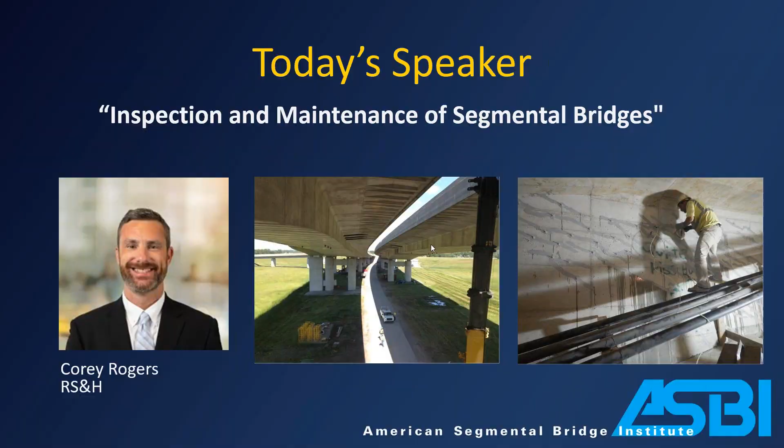It's working on it, Greg. Yep, we got it. We can see your screen and hear you as well.

All right, cool. Thanks, Greg, and thank you to the ASBI Executive Committee for giving me the opportunity to talk a little bit about NBIS inspection and maintenance of segmental bridges. Hopefully y'all learn a little bit about some best practices for both of these topics. We all got a love for segmental bridges, that's why we're here, so hopefully you pick something up here.

To start things off, one of the good reference documents is obviously the FHWA Bridge Inspectors Reference Manual. Even if you've been doing bridge inspections for a long time, it's worth a reread. I feel like every time I dive into the BIRM, as they like to call it, I learn something new or pick up on something different that can be implemented in the field or our inspection processes.

One of the key statements here when we're evaluating a structure is we're rating it on a 9 to 0 scale, 9 being the best, 0 being the worst, on the general condition of the entire component being rated. So we're making that engineering judgment, that inspector judgment in the field, and saying, okay, is this an isolated defect that's not impacting the primary element, or is this systemic across that entire primary component, and do we need to rate it as such?

The caveat being, if the isolated defect does impact the structural capacity of that component, then we can use that isolated defect to lower the condition rating. An example of that would be a segmental bridge - these things can be 1 mile or 2 miles long, so they're quite large. So taking all that into consideration for the superstructure can be challenging, sometimes a lot different than doing like an 80-foot PCI beam.

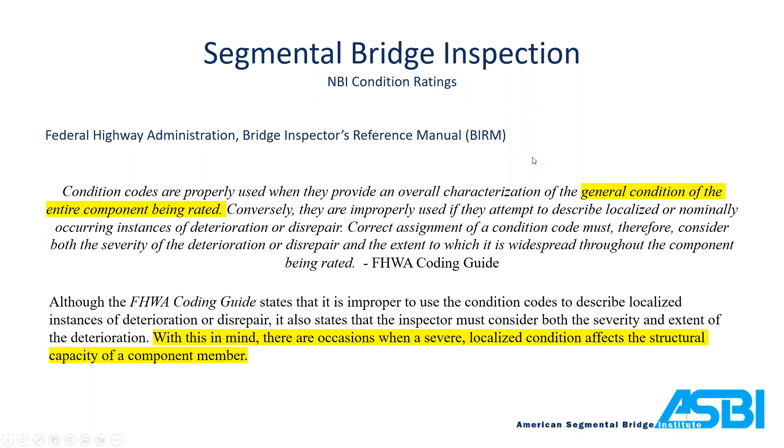So the 2 primary elements I'm going to talk about today are the deck and the superstructure. You can see here on a segmental bridge, it's basically a concrete box with steel reinforcement tendons, and the top flange also functions as the deck. So there's some overlap there between item number 58 and item number 59 in your superstructure, and the ratings should match up and be consistent as far as the comments go.

Again, here's the code description and the rating scale - 9 being excellent condition, which we very seldom use in the field. I'm not sure if I've ever seen a 9. Typically, we can find something wrong, and you can see here an 8 is also very good condition with no problems noted.

And then 7 is a good condition. So anything 9, 8, 7 is considered what we call good. 6 and 5 falls within the fair category, and then 4, 3, 2, 1 is what we would consider poor.

Understanding of what's good, what's fair, and what's poor helps you out in the field. And then the whole process is based on a plus or minus 1 scale, where another inspector may come out and disagree, and be 1 rating off, but as long as we're within 1, then we're good to go, and that's how the system is created.

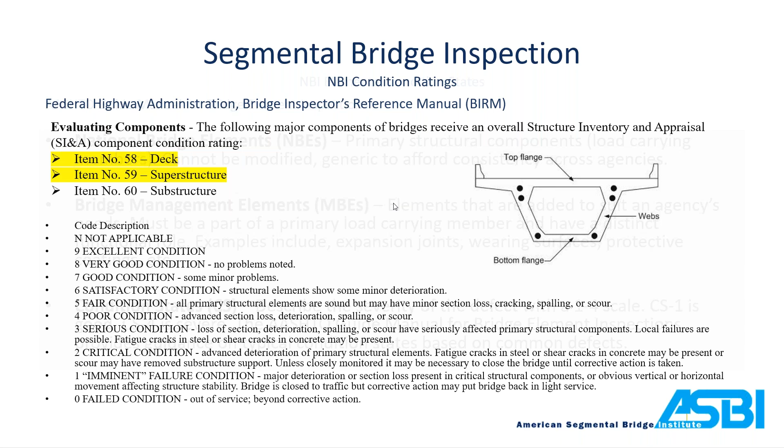In addition to the overall condition ratings, FHWA and AASHTO have implemented the National Bridge Elements, or NBEs, and these get a little bit further into the weeds, where we're actually identifying specific defects and quantifying them for the bridge owner's benefit, so they can schedule maintenance and address issues before they become so large that they impact the overall condition rating of the component.

Take it a step further from the NBEs are what we call the MBEs, the bridge management elements, and these are associated with the primary element, but they're on top. They're a protection system for the primary element. So think like bridge painting. The paint protects your steel, which is the steel beams, the primary element, or concrete surface coating, expansion joints protect everything underneath it. So it's another layer of documentation that bridge owners can use to better manage that structure.

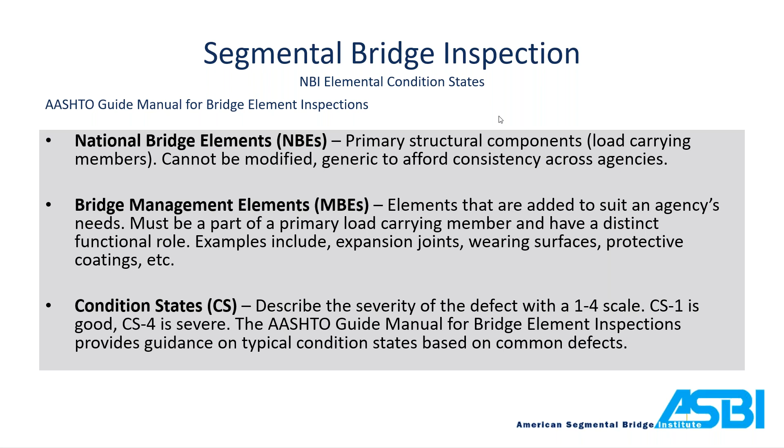And I'll give you some of the common MBE numbers that you're going to see, and these are pretty consistent. So for a segmental bridge, you're going to have NBE number 15 for your deck and slab, 104 for your superstructure.

Then a couple of the bridge management element numbers you would typically see are 520, deck slab protection system, which could be a thin epoxy overlay or a silica fume or latex wearing surface, and then 521 as an example, concrete protective coating. So you would rate that as what you see in the field, and then it gives the owner the information that they need to schedule the maintenance that's applicable to that particular item.

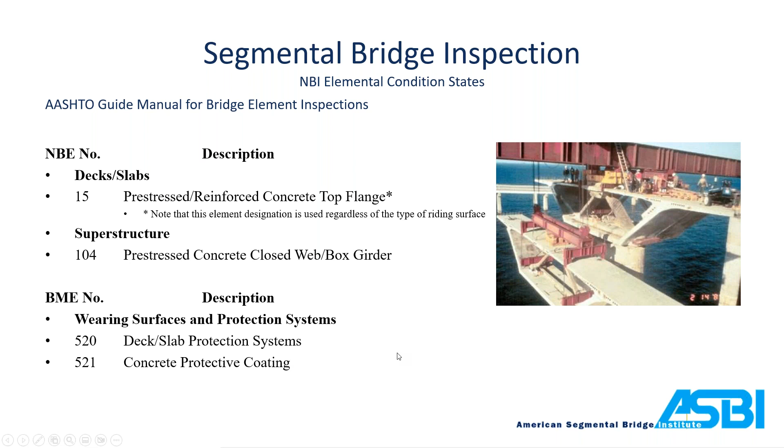So an example of that, if you're out there without the elements, or a combination of the NBI condition rating and the elements, it makes it more challenging for the owner to maintain that structure.

So say, for example, you have a 5,000 foot long segmental bridge, and you do have that spall location, and it's a minor spall, 4 square feet. It's not a big deal. It's not going to impact your overall condition rating, right? You're going to keep it at a 7.

You're going to say, this isn't systemic. This is an isolated issue. I got 5,000 feet of concrete that's in really good shape. I'm not going to drop my condition rating from a 7 to a 6 or 5 because of this one spall.

However, if you maintain that condition rating until that spall gets to the point where it's impacting structural capacity, say it gets deeper and deeper, and you start seeing rust leaching from it, and you're getting tendon corrosion as a segmental, now you're dropping it to a 6 or 5, and you're not capturing that defect until it gets to that point. With the element system, you're able to quantify that spall at an early phase.

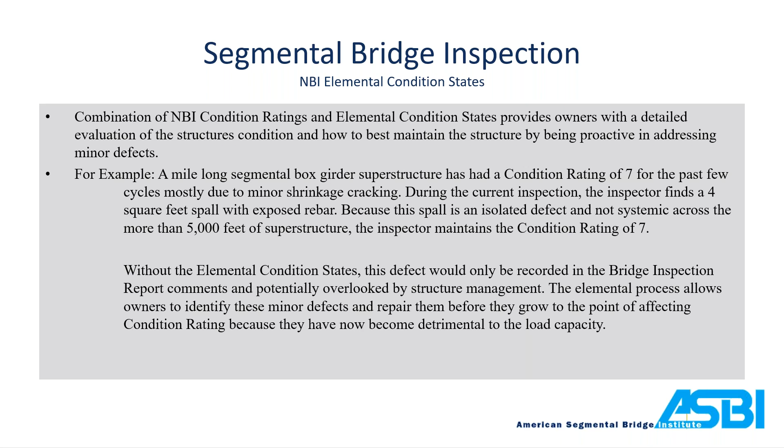And allow the bridge owner to get out there and do some patching, some rehab of that particular defect before it starts impacting your condition rating. So they really work in unison, and in particular, we really like the use of elements on these really long structures where you're typically not going to have systemic defects across the entirety of it, if that makes sense.

So pre-stressed concrete box girders are designed to limit tensile stresses in concrete. Therefore, cracks need to be identified and thoroughly investigated to determine causes and severity.

So think of it as a typical reinforced concrete structure. One of the primary objectives of the concrete is to protect the steel and keep it from corroding. I mean, the steel is carrying all of your tensile stresses. So whenever you have a crack, that opens it up to water infiltration, chlorides, which can facilitate corrosion of your steel, and that causes bigger problems. So cracking is always an issue.

And concrete cracks. I mean, it's going to crack, and we're just going to have to document it, watch it, determine what type of crack it is, and then what's the best method of mitigating that cracking or sealing it up and preventing that infusion.

Best thing is visual and physical inspections. You've got to bang on concrete to get a feel for it. Sounding rods, hammers, chain drags are pretty typical to find delaminations. Once you're out there in the field banging on stuff, you can really feel the delam, and you can also hear the sound of the sounding rod. It makes a dull thud if there's a delam, where it's more of a high-pitched ping through the bar if the concrete is sound.

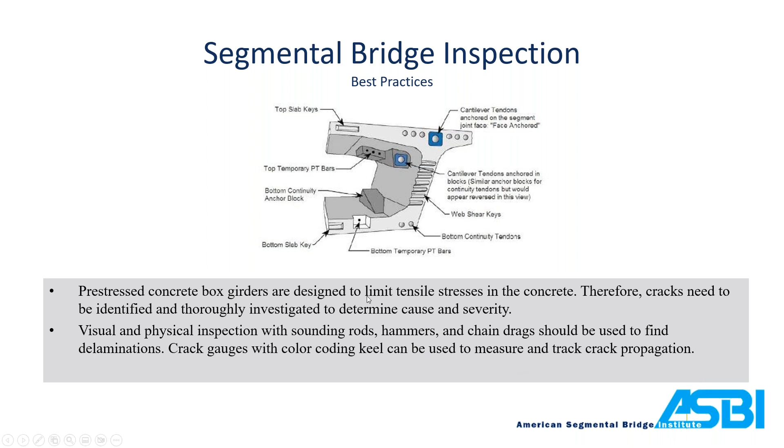We have seen where folks use crack gauges with different color keel to document it through every inspection to show cracks, like okay, this is a crack from 2012, and when you're out there in 2014, use a different color and document it. That way you can document the stage and progression of any cracking that you see, even if it's minor cracking.

And then I just want to give you an example of what can happen here. So this is an example from Texas on a precast box culvert, and this is what I like to show folks, the difference between a visual inspection and actually banging on things. So this is a crack, and from a visual standpoint, in the top slab of the culvert, if I'm looking down the culvert and I'm looking at this thing, I'm like, okay, we got a crack there, no big deal, right? Concrete cracks. It's worse than your minor 1/8 or 1/16 inch crack, where I'm going to rate this a 6, knock it down to fair.

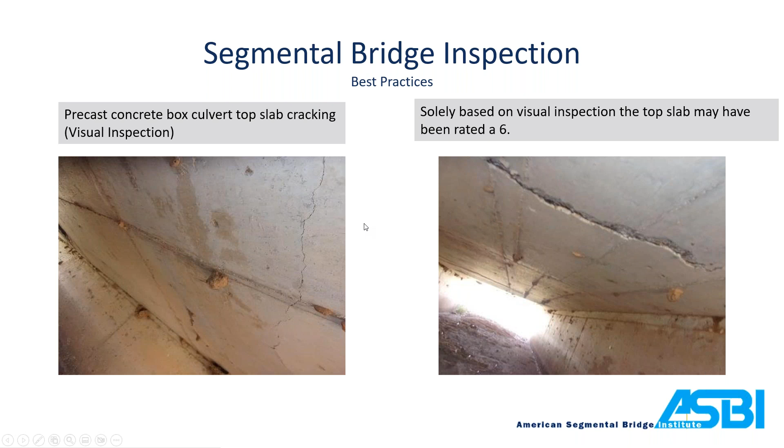Well, if you get inside this thing and bang on it, that concrete is actually really bad and falls off. And you can see here, you're probably pretty close to 50% section loss on your transverse top mat steel for this box culvert. This ended up requiring a load rating and posting, which resulted in a condition rating of a 3, a critical finding.

So this just kind of demonstrates how important it is to bang around those cracks and determine the validity of the concrete. What condition is that concrete in? How stable is it? Is there anything going on underneath there that's causing that crack associated with the steel?

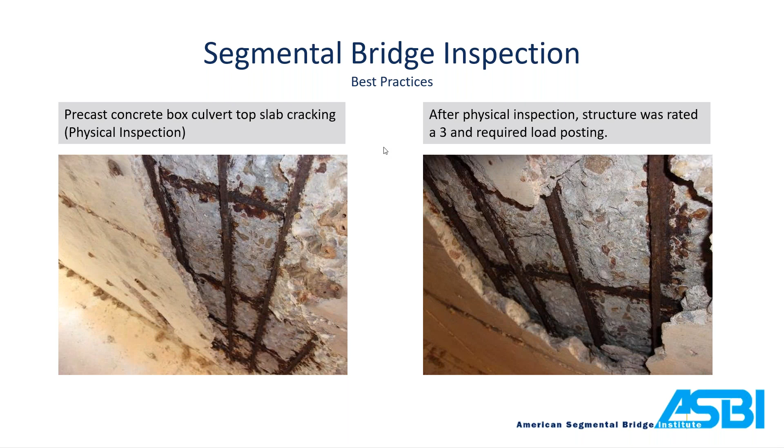So some other common deficiencies occur and to watch out for in segmental bridges. Cracking, I talked about that, and I'll get into the different types of cracking and how to identify those. Some of these other highlighted ones, efflorescence, that's a result of moisture and chloride penetration affecting your concrete. Usually you're going to see some rust leaching associated with that, or in conjunction with efflorescence. Alkali silica reactivity, ASR, a lot of times you have cracking or delamming, you really can't explain it. It typically has something to do with the aggregate or something with the concrete mix, alkali silica reactivity.

In those instances, you can take a core. A lot of departments and bridge owners can tap into some geo experts that can do an analysis and determine if it's actually an ASR issue.

Collision damage, again, these are long structures. If you've got 1.5 mile, 2 mile long structures, they're just more susceptible to cars running into barrier walls and banging the things up. Internal steel corrosion, again, whenever you see rust leaching on a segmental bridge, it raises a red flag. You need to do a deeper dive into that. And then loss of pre-stressing, you'll see some cracking around your anchorage terminals or some tensile flexural cracking as a result of those loss of pre-stress forces.

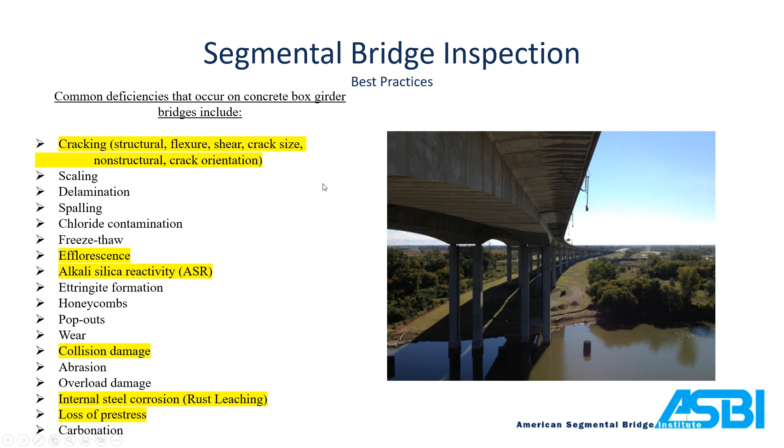So again, this is out of the BIRM. I just kind of consolidated the different cracking schemes here. So, shear cracking is going to be diagonal around your bearing areas. Tensile is going to be in your positive moment sections on the bottom of the slab, similar with the flexural. Anchorage, your segmental bridges inside will have these bump outs here where the tendons are locked off and anchored. If you don't have the required reinforcement here to support this anchorage, you could see some cracking around the anchorage.

Web splitting, this is fairly unique. You might see some spider cracking here around continuity tendons. Torsional, again, it's especially in structures on a curve. You may see some torsional cracking, and it may not be continuous. You may see what seems like a shear crack, but then you have some bottom slab cracking that's abnormal or not in a tensile zone or maximum moment zone.

And once you sketch this out, as you get your field measurements, then you can kind of make more sense of it and say, you know what, that might be some torsional cracking going on, and do a better look at it, pull some more resources in to take a look. And then thermal cracking, this is pretty typical, your standard shrinkage cracking. We don't get too excited about it, but we do want to try to keep those cracks as tight as possible to prevent moisture intrusion.

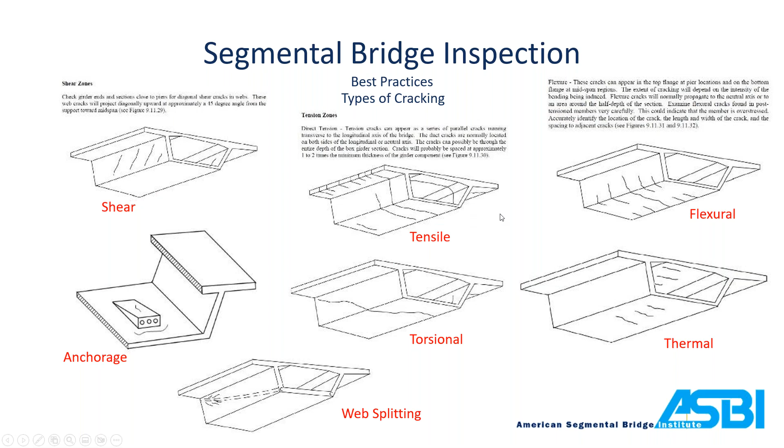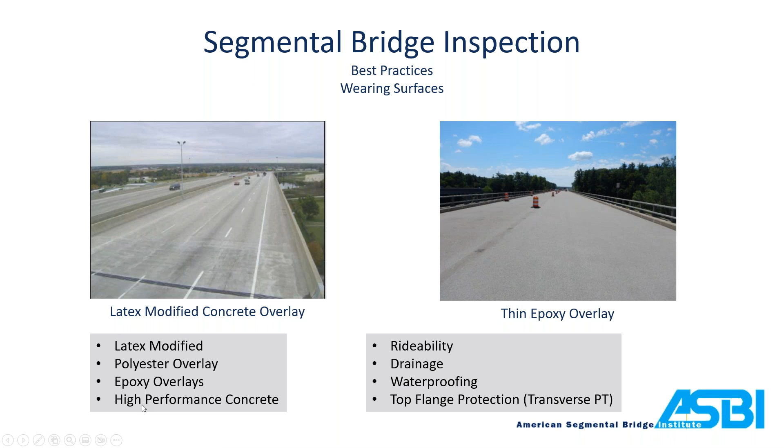The deck and the top slab are basically the same element on segmental bridges, and the top flange will be covered typically with a wearing surface, just to give you rideability and drainage. It protects your steel in the top flange and your transverse post tensioning for the wings carrying traffic. Those could be latex modified overlays, silica fume overlays. Now we're seeing more polyester overlays across the country. Epoxy overlays are still popular, or some other type of high performance concrete.

Bridge joints are a critical part of the structure. They allow it to move. Segmental bridges move quite a bit, so you're going to see what we call modular joint systems. Your typical joint system gives you about 4 inches of movement on a standard concrete steel bridge. Because of the spacing between joints on segmentals and the amount of movement you get on these things, you're going to see a modular joint consisting of multiple strip seal glands.

You see this is an example of 3. Each of these gives you about 4 inches of movement, so you're looking at 12 inches of movement total. That's why you have these big steel plates here on the barrier wall, because this can open up to the point where a pedestrian or somebody could fall through it. So it's important to keep these protected. Not only do they allow the bridge to move, they provide wheel load transfer across them. It's a watertight seal, so water doesn't impact any of our critical components below.

When you're inside the box, one of my recommendations is to get in there and stand underneath these things while traffic's going over it. Typically you can hear an issue with these joints. They should be pretty quiet, other than the wheels going across them. But if you hear any kind of slapping or clicking or metal on metal sounds, it's probably an indication that you're losing your neoprene bushings, or you have a cracked weld somewhere on these things, and it's going to need some type of remediation or replacement.

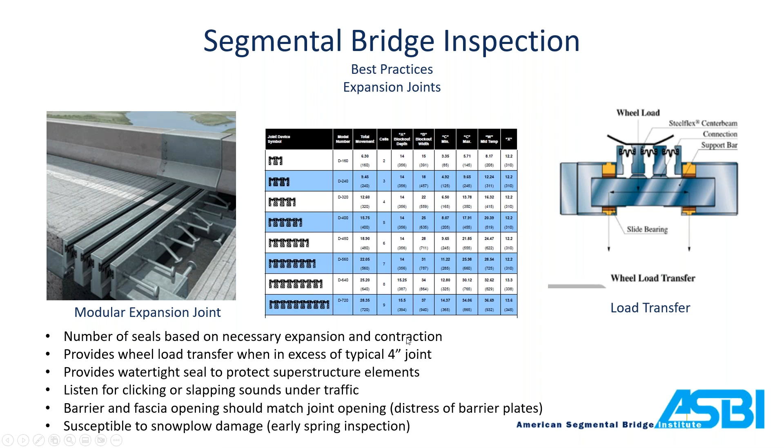Bearings, another critical component of segmental bridges. Again, talk about the movements—these things have to be able to move. Two of the bearings you're typically going to see on a segmental, just because of the weight of these things, is the old school pot bearing and the new school disc bearing. On the Zilwaukee Bridge project in Michigan, we actually replaced a bunch of these pot bearings and replaced them with disc bearings. They serve the same purpose, just one's a newer style, fewer components, easier to inspect and maintain. You can see here the pot bearing is multi-directional rotational, but you have this elastomeric pad, an internal sealing ring, a steel piston, PTFE, and a stainless steel top plate.

So the failure we saw in Zilwaukee was they were over rotated. Right from the get-go, we were having issues with the internal sealing ring, and we were actually losing some of this elastomeric pad. This neoprene was oozing out of it. It was under so much pressure, it was actually becoming a liquid and oozing out of the ring.

And then we were getting some gouging on the steel plates that was causing the structure to bind up. So we swapped them out with these disc bearings, and you can see there's fewer components. Primary component is this urethane disc here. You have the stainless steel and the PTFE for your bond breaker and your sliding, and then you just have this threaded pin through the center, which you really can't see.

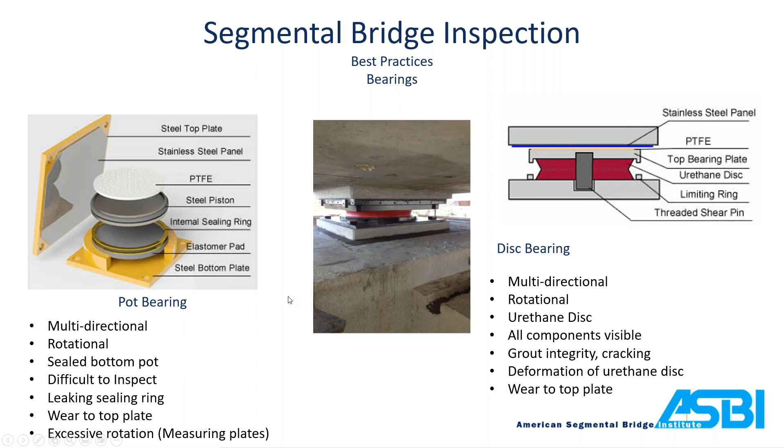Drones are becoming more and more popular. We really haven't fired all the bridge inspectors and replaced them all with drones yet. It's still hard to beat the hands-on inspection and the visual inspection of actual bridge inspectors, but they do come and use them. They're getting better and better with these LiDAR scans where they're giving us a good 3D visual.

We like to use them as kind of a preliminary analysis for pier caps, especially if traffic control is tight. Sometimes you're getting a snooper out there in lane closures. You're restricted on what you can do and what you can close and your time constraints. If you can fly a drone up a 100-foot pier and get a look at it, look at the video and identify any cracks or target areas where you need to then get a hands-on inspection, that's a good use for them, almost like a reconnaissance operation. And then you can follow up with the hands-on and better manage your time.

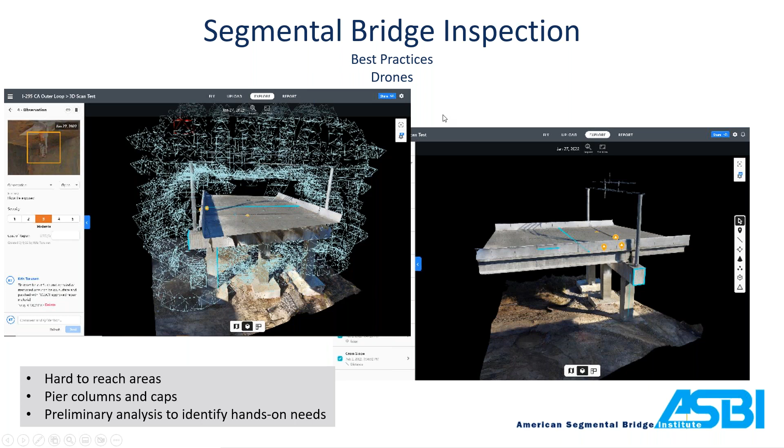Non-destructive evaluation: if we find that rust leaching or there's concerns or cracking, loss of pre-stress, or we think something's going on with the tendon, we do have the technology now to do a deeper dive into that and actually look at these tendons while they're in place.

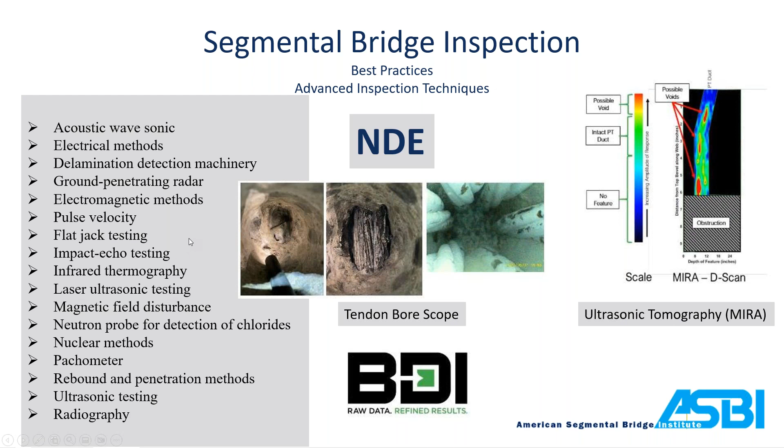I like to reference BDI. They got a lot of this technology for use, so I stole a bunch of their stuff, but they're doing tendon bore scopes. You can do this ultrasonic tomography, this MIRA scans that actually give you an idea of where some grout voids may be or what the condition of your tendons are. And then you can actually do a small core hole, get a bore scope in there, and actually get a visual on your steel and see what kind of condition it's in. So that technology does exist to look at these things in further depth.

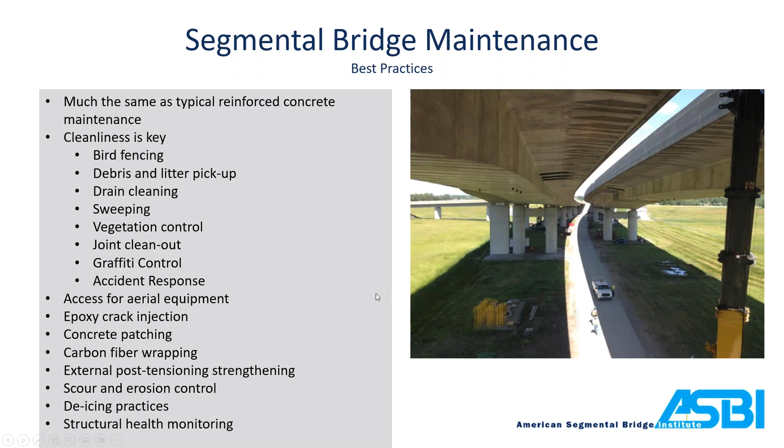So for the maintenance, think of it as it's a typical reinforced concrete structure. It's just big, it's concrete and steel. We want to keep the cracks tight, we want to keep the cracks sealed and protect all of the steel that's internal to the concrete. Cleanliness is key. Some of the success for Zilwaukee Bridge, built in the late 70s, early 80s, still looks great, is the maintenance guys have always done a good job of keeping the birds out.

Like I said, you got 12 inches of movement at these expansion joints. The maintenance guys on Zilwaukee, they had a system that the fencing for the bird fencing, we call it, actually slid, expanded and contracted with the bridge to keep those out, so it wasn't a constant maintenance headache. But if birds or other critters get in there, they can make a mess of it pretty quick. Bird droppings hold moisture, which is bad, it starts deteriorating your concrete, your steel. Keeping debris and litter picked up off the top along the barrier wall.

Make sure your drains are clean and water's flowing properly. Normal sweeping of your bridge deck. Vegetation control, not only for inspection purposes, but again, you don't want that moisture up against the piers. Make sure your joints are cleaned out and functioning properly. Graffiti control, and then have like an accident response situation. Again, vehicles get stuck up there, it can become a bigger problem. Make sure you got access for aerial equipment. Keep everything, if you have a maintenance road down below, keep that maintained so you can get down there quickly. Having brush control and grass mowing is nice because you have quick, easy access for bucket trucks or aerial equipment if you need to.

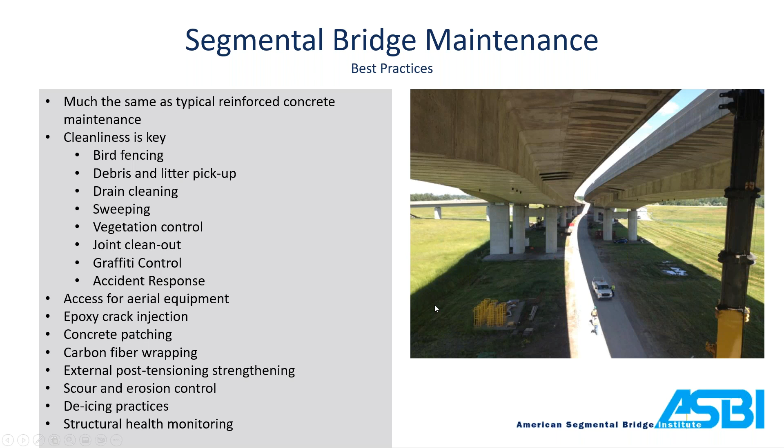Crack injection is a big one. Concrete patching, carbon fiber wrapping is a new thing we're seeing. West Seattle Bridge just did a ton of carbon fiber wrapping to strengthen it. External post tensioning is kind of above and beyond, that's the next step if you have an old bridge that needs additional strengthening. And then controlling that scour and erosion, and then structural health monitoring. We'll talk a little bit about that.

I mean, it doesn't look pretty, but you can grind these down and do a concrete surface coating over it, and then you won't even know it's there. Nice thing about these epoxies, some people are like, well, I can't monitor the crack if I do an epoxy injection. Most of these systems, the stuff is just as brittle as concrete, so if your crack is propagating, these epoxies are going to crack, and you can still determine if the crack is moving or working while trying to seal it.

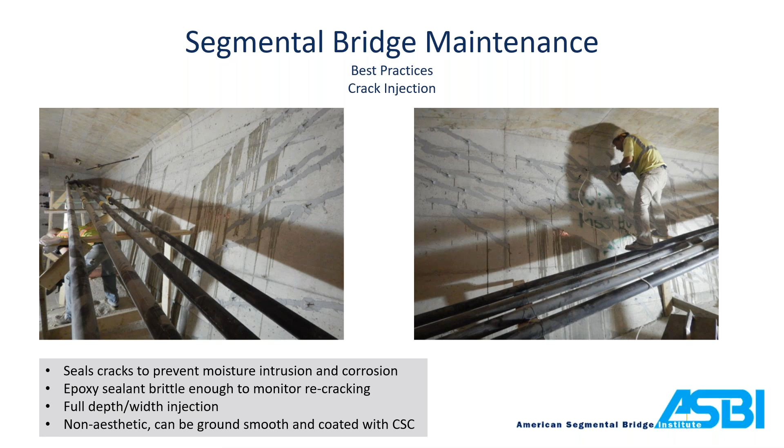Carbon fiber wrapping improves shear and flexural strength if you need it to. It's also for confinement for concrete patching. I know sometimes it's difficult to do an overhead patch and have it stay in place, so covering that with some carbon fiber can help hold that concrete in place.

It is surface prep dependent, you got to have a clean surface like a lot of other things. And carbon fiber is susceptible to impact and UV damage. You hit it with a hammer, it's going to break. And it doesn't like the sunlight, so you want to have like a polyurethane surface sealer over top of it to protect it against UV once it's complete.

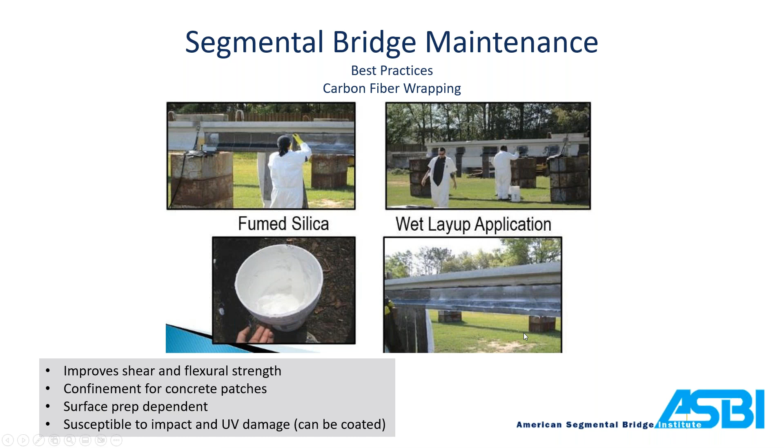Surface prep, again, with concrete remediation and maintenance, concrete surface preparation is critical. You need it for your overlays, wearing surface overlays, thin epoxy overlays, crack injection, carbon fiber wrapping, concrete surface coating - all dependent on the prep.

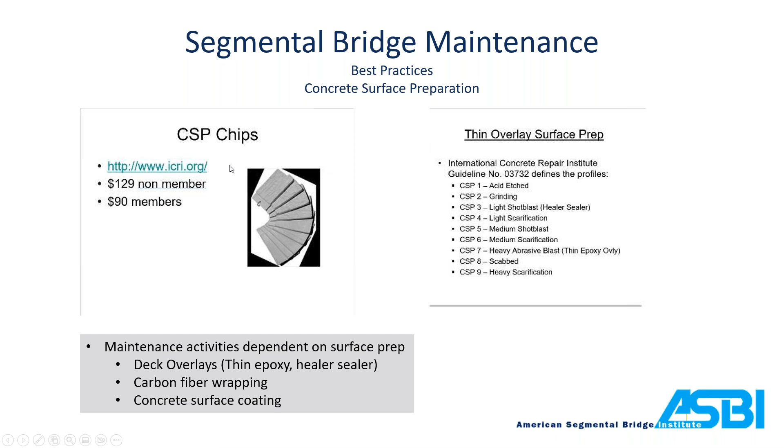The International Concrete Repair Institute does sell these CSP chips, and these are really valuable for in the field, because you can actually hold it up against concrete and say, yep, it matches my profile on my chip, you're good to go. So I highly recommend if you're a construction inspector and you have a project, carry a set of these chips in your truck with you.

Thin epoxy overlays, again, multiple ways to put these on. I've seen crews that do it with the bucket system. I've seen trucks, automated trucks that are mixing this thing and spreading it all in one shot. It really doesn't matter as long as it's getting the job done. Thin epoxy overlays will bridge the crack and sit on top and have a heavier aggregate. Typically they're 2-coat systems. A penetrating healer sealer will penetrate the crack, and then it just has a sand aggregate on top just to take the sheen off. So they're a little bit different.

Crack chasing is basically using a ketchup bottle, mixing the stuff up, and then if your crack is fairly spaced out, you can just kind of walk across the bridge deck and seal them up with the maintenance crews. Deck patching - you want to do all the deck patching prior to putting the overlays down.

If you're concerned with skid resistance, the bauxite aggregate is hands down the best aggregate you can use for long-term skid resistance. There's been numerous tests on this against other aggregates in the industry, and bauxite just outperforms all of them by a long shot.

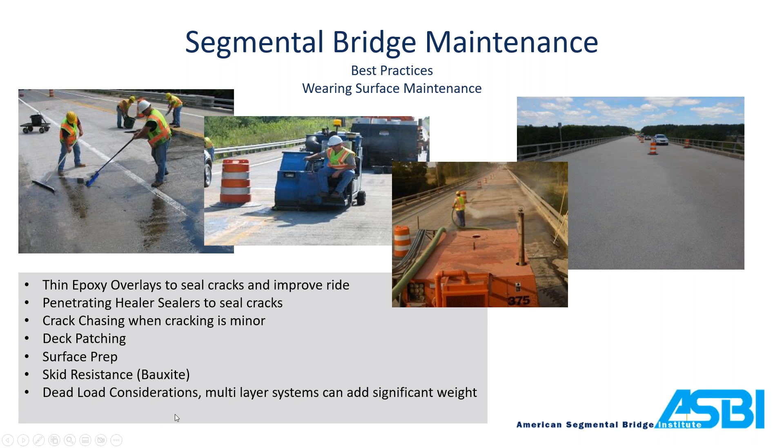One thing to consider before going full blown with a thin epoxy overlay is what does it do to the dead load on the bridge? Some of the older segmentals are right there on the cusp of rating factors of 1.0 or just above. You do add quite a bit of weight if you go with the 2-coat thin epoxy overlay, given the amount of aggregate you add, and it may be enough to push you over where your rating factor drops below 1. So it's something to check before you jump into a thin epoxy overlay.

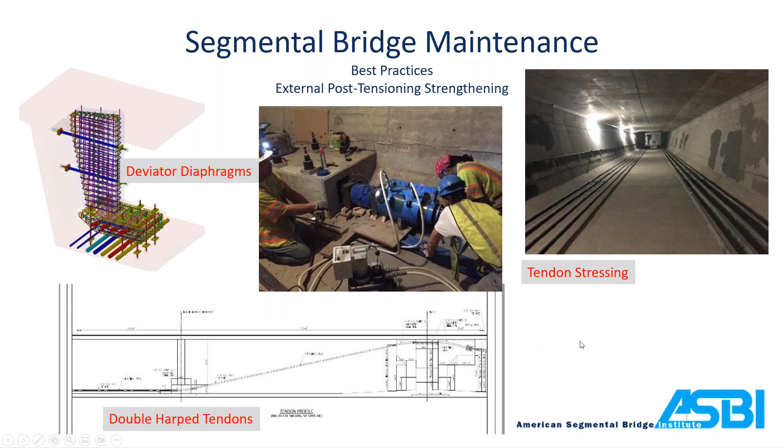External post tensioning, this is where you have issues with inadequate tendon reinforcement in your bridge and structural capacity. US 31 over Muskegon was just that. We had a lot of shear cracking and anchorage cracking because we didn't have enough reinforcement around the anchorages or in the shear zones. So we did an external tensioning project with deviator diaphragms and double harped tendons. You can see how the tendons harped up through the pier diaphragms and then back down, and then we stressed these things and basically squeezed the bridge back together, closing the cracks up.

Some lessons learned from that project: ground penetrating radar can be very accurate or it can be really sloppy, it depends on the firm. Luckily, we had just gotten off a previous segmental bridge project where we had a really good GPR contractor that was right on the money with their locates of tendons and critical reinforcing steel. So when we got to Muskegon, the first GPR contractor was out there and whipped through it, took about a day to mark everything, and they were off plus or minus 1.5 to 2 inches, which was too far for us since we were splitting hairs coring through bars with 3-inch spacing.

So plus or minus 2 wasn't going to cut it. We had another contractor come in and they dialed it in and got us right on the money. But if we hadn't known from our previous project what the capabilities of GPR were, we would have bought the old saying, 'well, that's as good as we can get, we can only get within 1 inch or 2,' which isn't the case. You can get it perfect if you get the right crews out there.

As-builts: on the Muskegon project, the as-builts were great, right on the money. We were able to pull tape, use the as-builts, and 9 times out of 10 we were right on top of the tendon we were looking at. We would still do some pilot coring just to make sure it was there, but having a nice, good set of as-builts goes a long way. So if you're on a construction project building a new segmental, remember the guy 20 or 30 years from now doing maintenance is going to love you if you take the time to put together a good set of as-builts.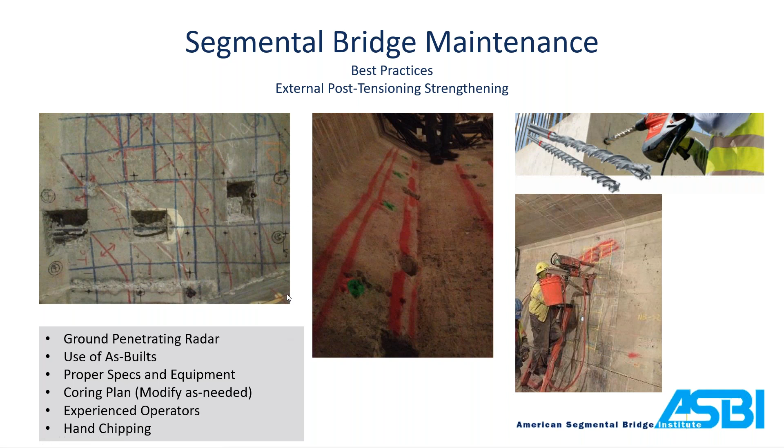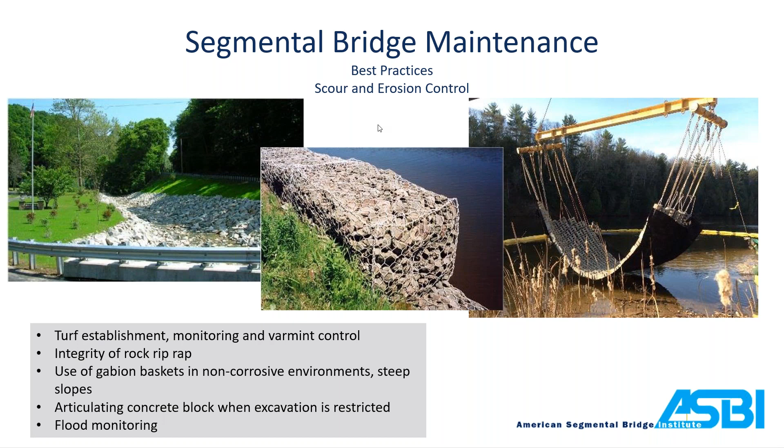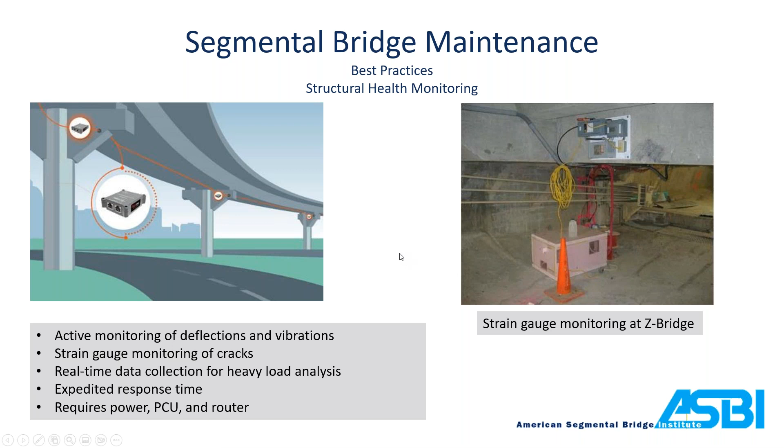So that's the quick and dirty of it. If anybody has any questions about inspection or maintenance, I'm happy to help.

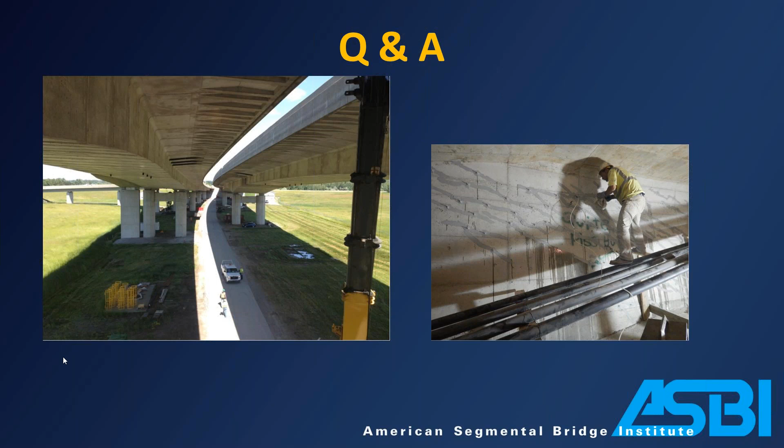All right, well, thank you Wade and thank you Corey. Appreciate your presentation today and your remarks, and particularly appreciate your emphasis about joints. You know, for segmental bridges that is a remarkably important detail, because you have pourbacks that are susceptible to corrosion, and water inside of a box is always a bad thing. It's always one of the things to look for, make sure you're crawling inside the boxes and looking for that. We've had boxes that had standing water for who knows how long, and that's usually a pretty easy fix.